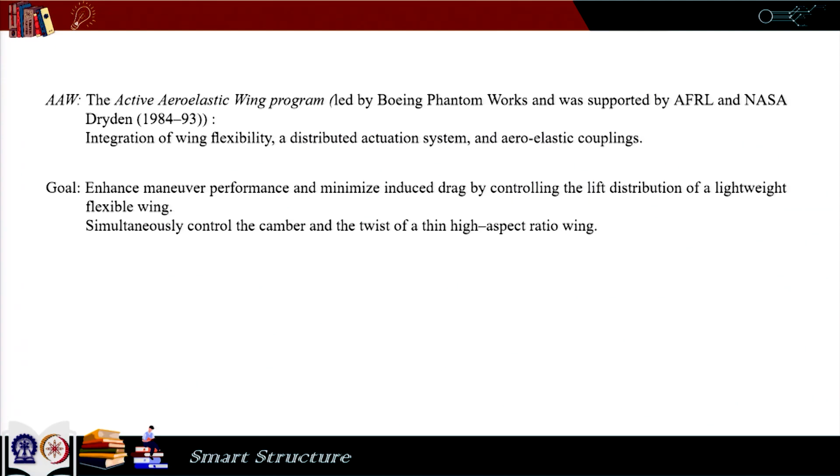Welcome to the third lecture. We will continue with the applications. AAW, the Active Aeroelastic Wing program, was led by Boeing Phantom Works and was supported by AFRL and NASA Dryden. It was about integration of wing flexibility, a distributed control actuation system and aeroelastic coupling. Here the goal was to enhance maneuver performance and minimize induced drag by controlling the lift distribution of a lightweight flexible wing.

Induced drag is also known as lift induced drag, and it can be controlled by controlling the lift distribution, and that is what they did. Simultaneously, control of camber and the twist of high aspect ratio wing was also the goal.

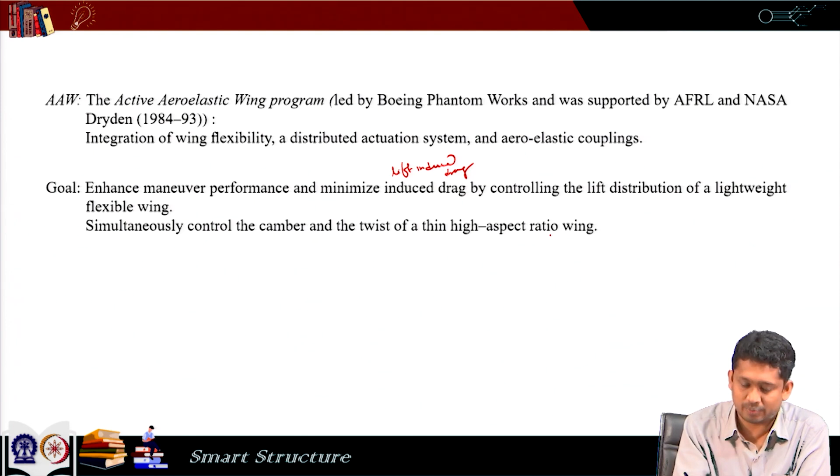Enable is evaluation of new actuators in buffet load environment. It was initiated by US Air Force and other participants were from Boeing, NASA, Australia and Canada. Its goal was to address a very practical problem encountered by high performance aircraft. When they are at high angle of attack, they often experience buffet loads. Those are unsteady differential pressure that happens due to edge vortices, and it leads to premature fatigue of the airframe.

And sometimes these vortices couple with other vortices that come from engine inlets and airframes, and that can be even more significant. Here the goal was to examine the performance of two sheet actuators, macro fiber composite actuator and active fiber composite actuator. These are composite actuators, so direction dependent actuation is possible. Macro fiber composite was invented by NASA. It is a piezoelectric composite, and it was then commercialized by Smart Materials in Germany.

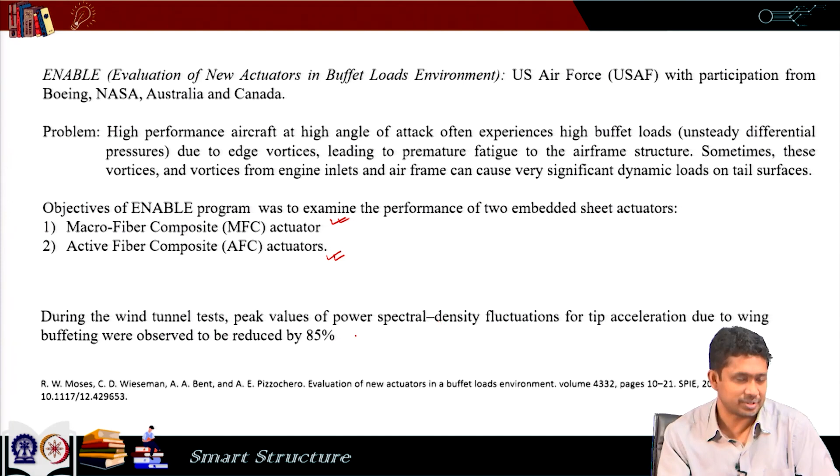ACROBAT stands for Actively Controlled Response of Buffet Affected Tail. It was a NASA sponsored program executed by Wright Laboratory and Daimler Chrysler. It used a 1/6 model of F/A-18 wing with piezoelectric sheet actuators placed at an angle at its root, to ensure both bending and torsional deflection.

A twin tail aircraft model was successfully tested in a low speed wind tunnel under the active vertical tail program led by McDonnell Douglas Aerospace to actively reduce buffet loads in a 5% scale model by controlling the first two bending and first torsion modes using piezoelectric actuators attached to a spar.

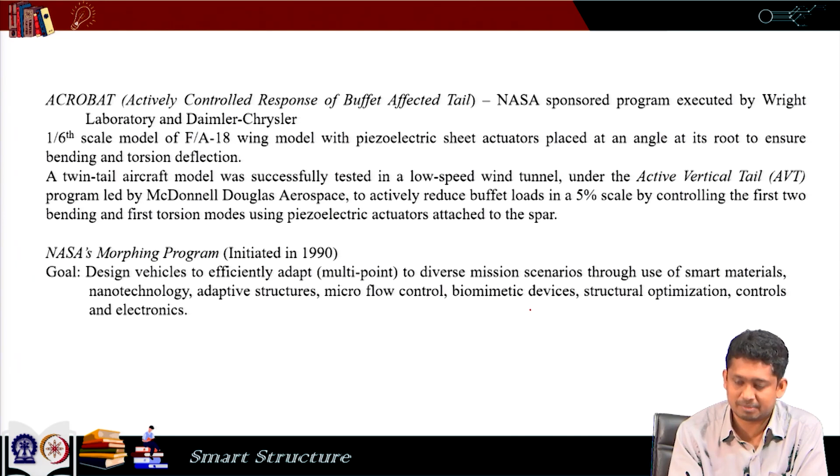Then NASA had a morphing wing program that was initiated in 1990. Here the goal was to design vehicles to efficiently adapt to diverse mission scenarios through the use of smart materials, nanotechnology, adaptive structures, microflow control, biomimetic devices, structural optimization, controls and electronics.

Now, we will talk about noise control in aircraft. Noise is something where a lot of research goes on, so noise control is an issue. Noise comes from engine, turbulent boundary layer, air conditioning and so on. Most of the noise control methods are passive, and those passive techniques have been quite successful. Noise has been reduced by a satisfactory amount, and there are two items where a lot of research is going on.

One is called acoustic metamaterials and sonic crystals. These are based on metamaterials concepts, where a lot of research has been done and found to be quite useful. But the idea is that if some kind of active component is added to the solutions, then the efficiency can be further improved, and that is what has been done in these two papers.

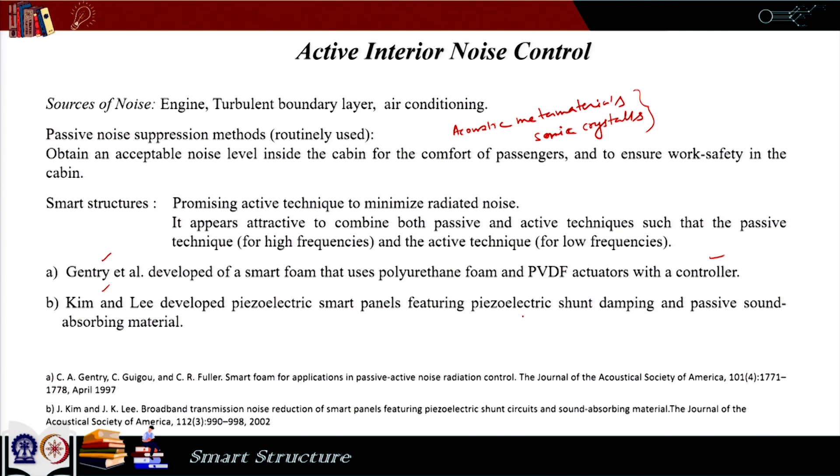Gentry and others developed smart foam that uses polyurethane foam and PVDF actuators with a controller. Kim and Lee developed piezoelectric smart panels featuring piezoelectric shunt damping and passive sound absorbing material.

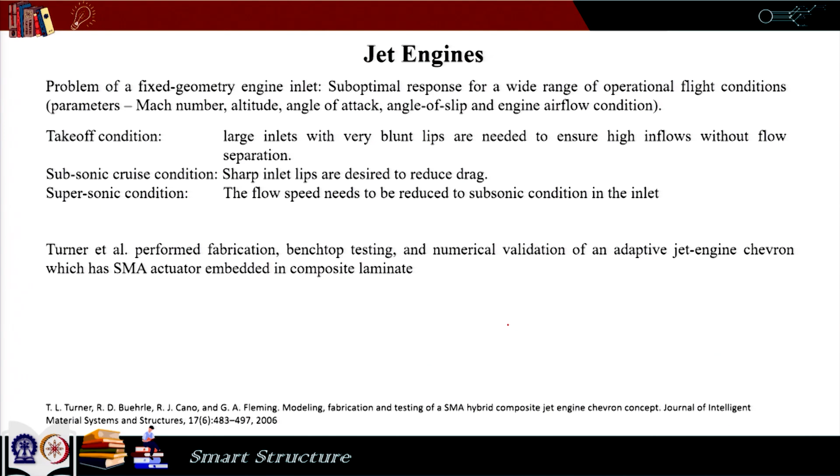Now, we will talk about jet engines. In jet engines, the problem is that if the jet engine has a fixed geometry inlet, then it does not work optimally in a wide range of wind speed, because at different wind speed the requirement is different. For example, in the takeoff condition, large inlets with very blunt lips are needed. This ensures high inflow without flow separation.

In the subsonic cruise condition, sharp inlet lips are desired to reduce the drag, whereas in supersonic condition the requirement changes. The flow speed needs to be reduced to subsonic condition in the inlet. So, the solution lies in some kind of adaptive inlet geometry, which can adapt to the changing wind speed.

Turner and others performed fabrication, benchtop testing and numerical validation of an adaptive jet engine chevron, which has shape memory alloy actuators embedded in a composite laminate. Composite laminates can be made shape adaptive just by sequencing the ply orientation in a proper way. We will talk about it when we discuss composite materials in more detail. Again, if some active component is added, here with shape memory alloy actuators, it can be even more shape adaptive.

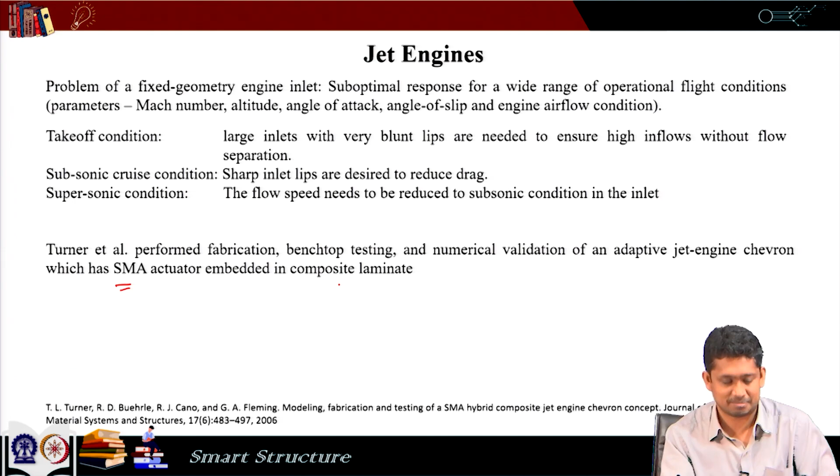Boeing 777-300ER with GE90-115B engine, which has a variable geometry chevron, which has 60 nitinol strip actuators. Now, Hartl and others carried out training and thermomechanical characterization of nitinol for application in the Boeing variable geometry chevron. So, after 50 thermomechanical cycles, the response was found to be quite stable with repeatable strain up to 1.6% over a wide range of applied stresses.

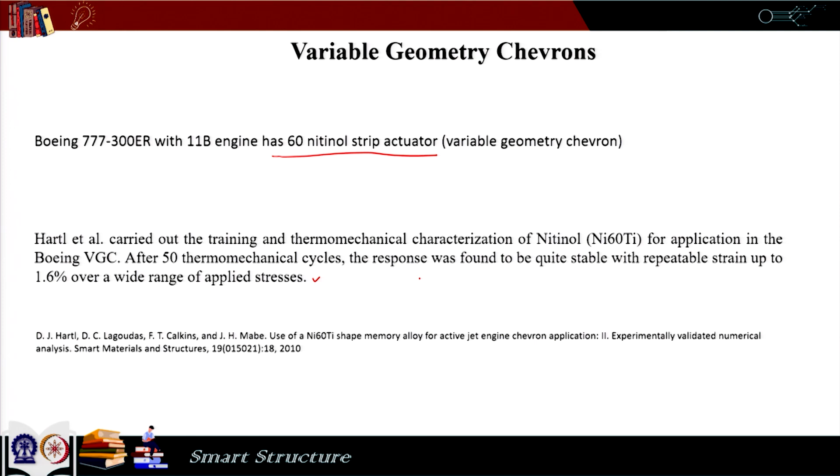So, shape memory alloys need something called training, where loading and unloading is done in a cyclic manner. We will talk about it again when we discuss shape memory alloys in more detail. So, that is what was done here, and the observations are mentioned. More details can be found here.

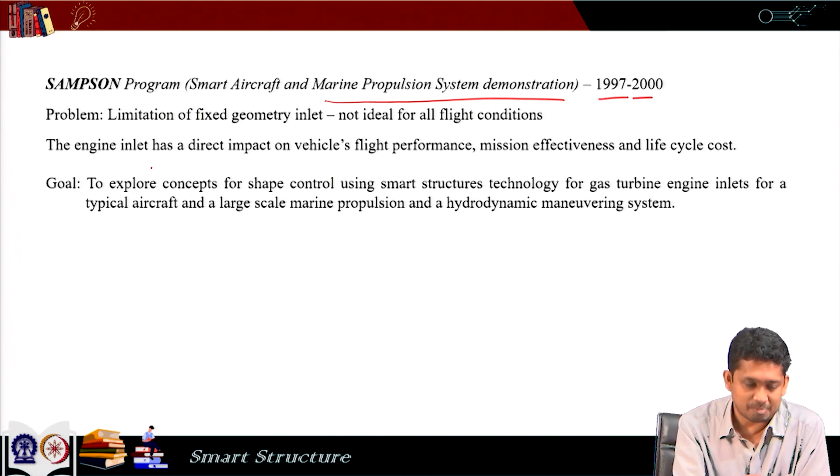The SAMPSON program has a similar goal. It is Smart Aircraft and Marine Propulsion System demonstration. It was between 1997 to 2000. The problem they addressed is similar, the limitation of fixed geometry inlet, which is not ideal for all flight conditions, and the engine's inlet has a direct impact on the vehicle's flight performance, mission effectiveness and life cycle cost.

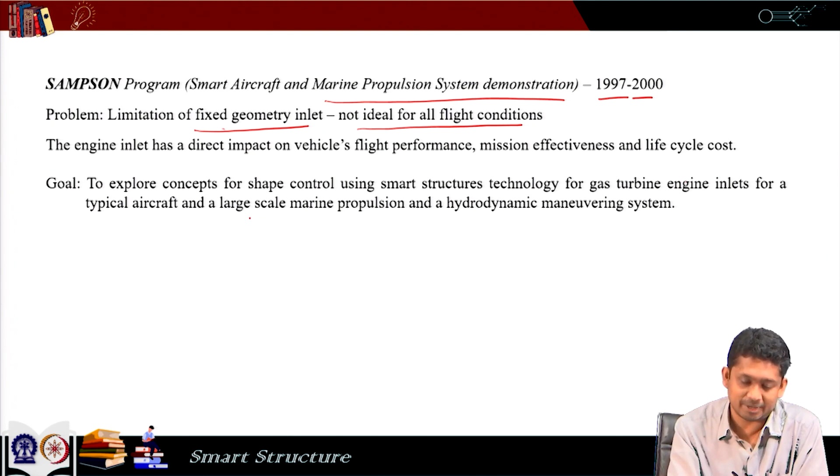So, the goal here was to explore concepts for shape control using smart structures technology for gas turbine engine inlets for a typical aircraft and a large marine propulsion and hydrodynamic maneuvering system as well.

In rotary wing aircraft, for example, a helicopter has a rotor. This rotor adds significant complexity. First of all, a rotor has complex motion. A rotor can have edgewise vibration, flapwise vibration, twist, and there are several modes where all these motions are coupled. It is connected to a hub. The hub itself has its own complicated kinematics. So, that makes the vibration of the rotors quite complicated,

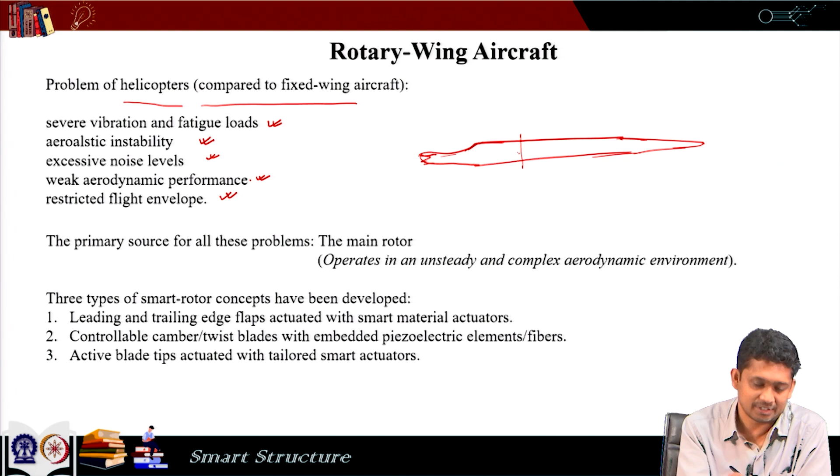and it is in a complex aerodynamic environment. So, there are significant complexities: severe vibration and fatigue loads, aeroelastic instability, excessive noise, weak aerodynamic performance, and restricted flight envelope. And as mentioned, the primary source for all these problems is the rotor.

So, three types of smart rotor concepts were developed: leading and trailing edge flaps actuated with smart material actuators, controllable camber twist blades with embedded piezoelectric element fibers, and active blade tips actuated with tailored smart actuators.

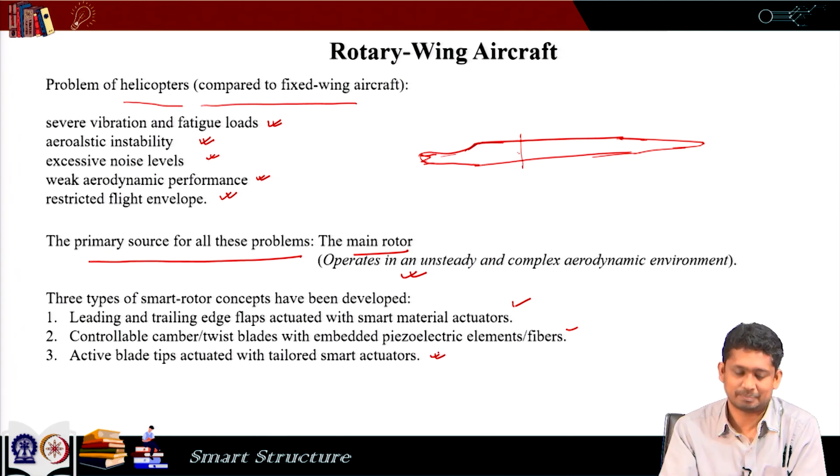Now, we will talk about civil structures. The applications are diverse in civil engineering structures as well: structural health monitoring, vibration monitoring and suppression, minimization of vibratory loads, earthquake mitigation. The objective here is to maximize civil structure performance, to control structural motion, monitor health, minimize life cycle cost, and most importantly increase the overall safety.

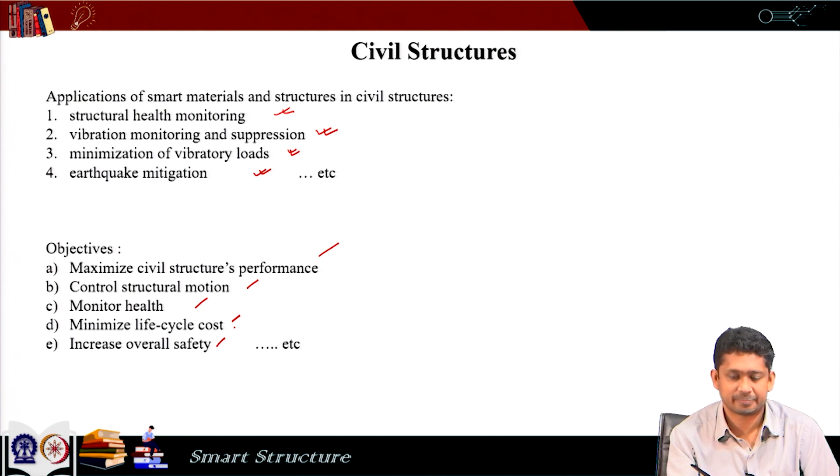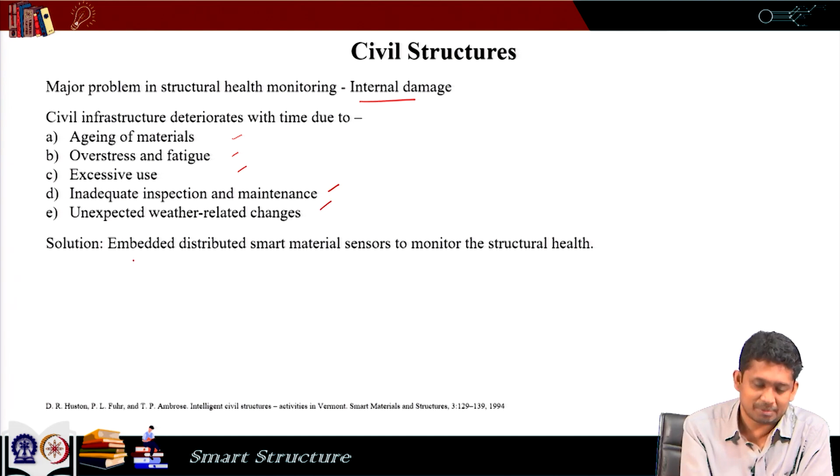Now, a major problem in structural health monitoring is internal damage. Civil structures deteriorate with time due to several factors: aging, overstress, fatigue, excessive use, inadequate inspection and maintenance, unexpected weather related problems. So, embedded distributed smart material sensors to monitor the structural health is a solution.

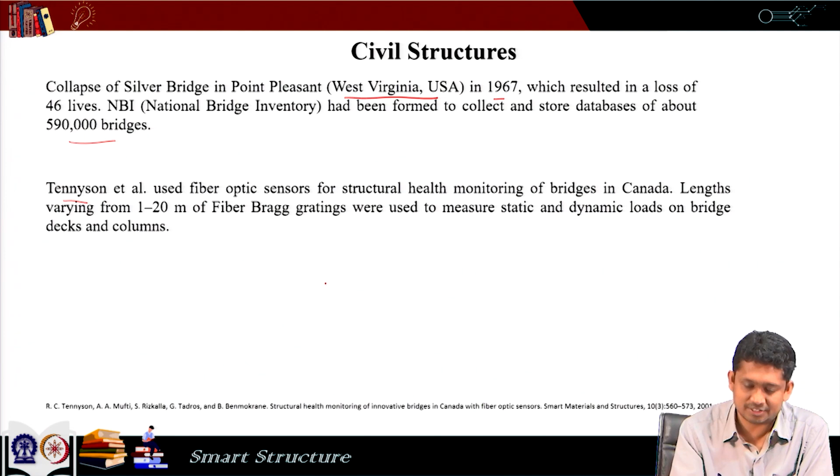There is a study by Tennyson and others. They used fiber optic sensors for structural health monitoring. With the fiber optic sensors, they monitored the strain at various parts of the bridge as the vehicles passed by, and strain variation like this was found.

Now, if this kind of strain variation is monitored on a regular basis, then any anomaly can be detected. That was the goal of this kind of work, and strain monitoring is used a lot with the help of fiber optic sensors for civil engineering structures.

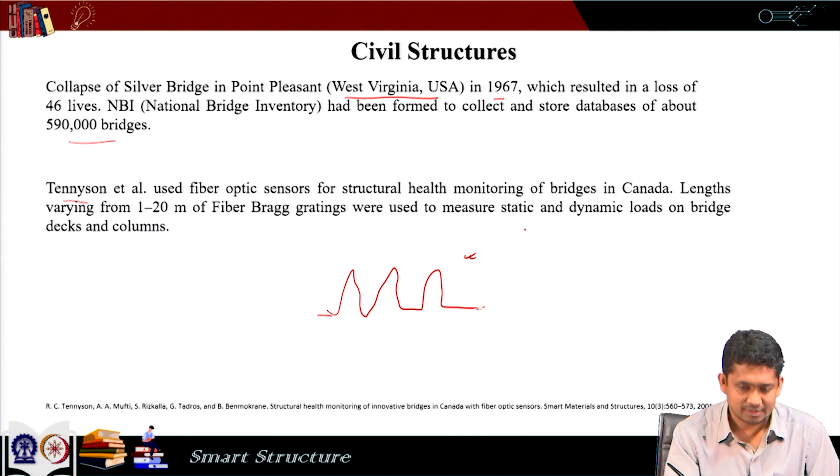Suspension bridges and cable stayed bridges all have these cables as a major component of the structure. Now, apart from the loads due to traffic or earthquakes, wind load also causes a lot of severity in these structures. Because of complicated interaction between the wind and the structure, phenomena like vortex induced vibration and flutter happen. An example is the failure of the Tacoma Narrows Bridge in USA.

Now, it was observed that if the tension in the cable can be monitored, that can help a lot for monitoring these bridges. So, that was the goal of this study carried out by Wang and others. They measured the tension in the cable using PVDF piezoelectric film sensors.

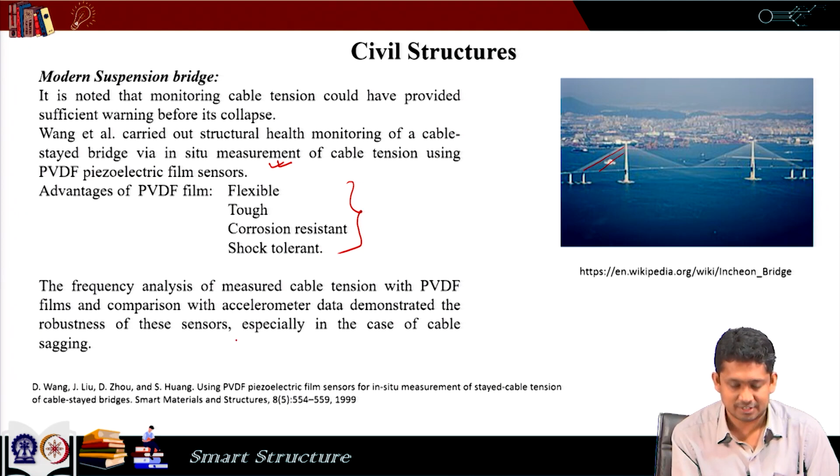As was mentioned while comparing different smart materials, PVDF has a much lower elastic modulus compared to PZT. Because these cables are somewhat flexible, PVDF was found to be a better solution here. And it was observed that frequency analysis of measured cable tension with PVDF films and comparison with accelerometer data demonstrated the robustness of these sensors, especially in the case of cable sagging.

Now, vibration control is another aspect. Magnetorheological fluid is used a lot for this kind of application. A semi-active MR damper is used to stabilize large amplitude motions due to high gusty winds and traffic vehicles. It helps reduce fatigue and corrosion of the strands and increases the safety and durability of the bridges.

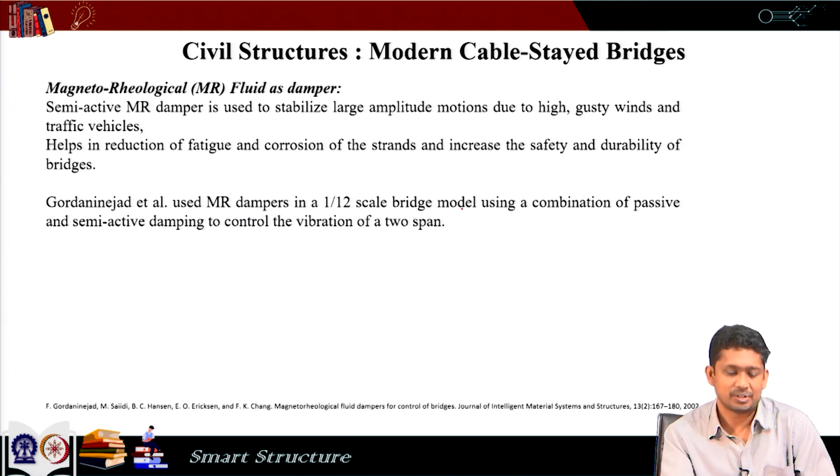So, Gordaninejad and others used MR dampers in a 1/12 scale bridge model, using a combination of passive and semi-active damping to control the vibration of two spans.

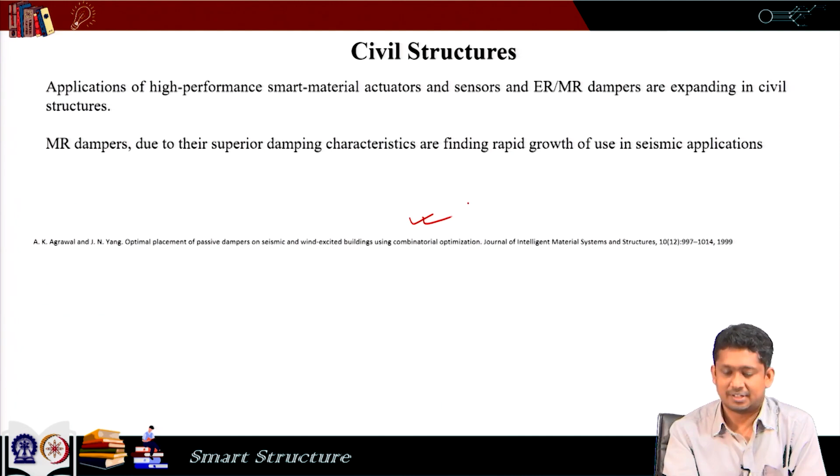So, MR dampers are finding growing applications in civil engineering structures. An extensive study on MR dampers for seismic and wind excited buildings can be found here, and here we can find some optimization also for proper usage of these dampers.

Now, we will spend some time on structural health monitoring, because it is a very cross disciplinary problem. Aerospace structures, civil structures, mechanical structures, marine structures, everywhere the monitoring of the health is needed to enhance safety and efficient use of these structures. Structural health monitoring is basically based on the principle of looking at the structural response to some known or unknown excitation, and from the response data is analyzed and some information about the structural health is assessed.

So, structural health monitoring can be passive. In a passive, generally no actuator is needed. Whatever the structural data is obtained because of the ambient condition, that is used to find out the structural damage status. So, passive examples can be vibration based monitoring.

Now, vibration based monitoring can be done with known vibration also by hitting it with an impact hammer or shaker, but when the vibration based monitoring is done just by looking at the ambient vibration due to the ambient load condition, that is a passive monitoring. Acoustic emission, these are all passive techniques.

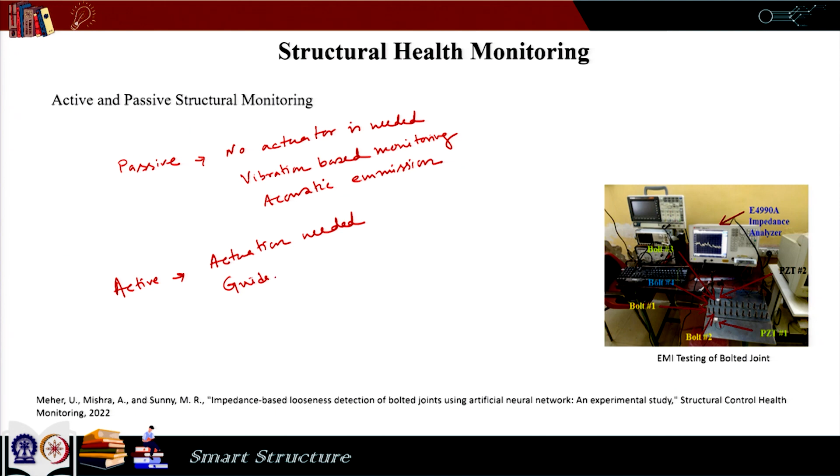Active techniques involve actuation. So, some known signal is given to the structure and the structural response is looked into. So, it can be a guided wave based technique, electromechanical impedance technique. These are all active health monitoring techniques.

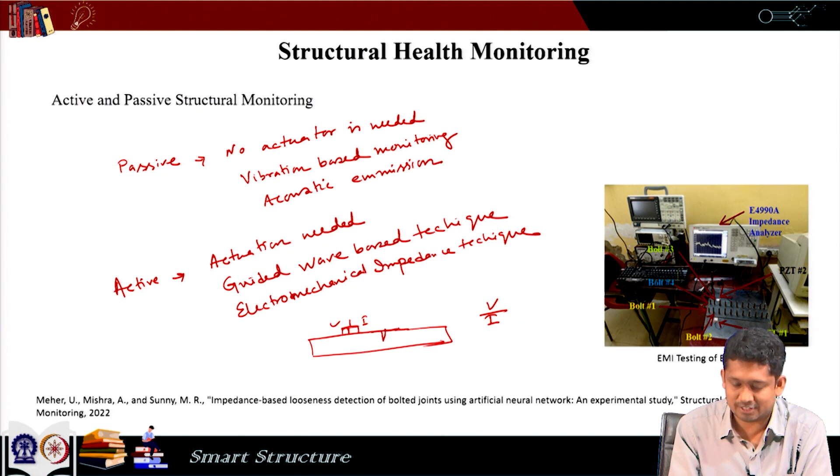So, in an electromechanical impedance based technique, if I have a structure with some piezoelectric patch fitted to it, if I apply some voltage to it, I can measure the current also across this patch. So, the V by I, this ratio is the electromechanical impedance obtained here. It is electromechanical because this impedance depends on the structural property also. If there is some flaw in the structure, this impedance changes, and from this change structural health can be assessed.

Now, here is one example. Here an experiment is being done in our lab to find out any looseness in bolts. So, it needs an impedance analyzer and it has bolts, the looseness of which is being monitored, and it has piezoelectric patches.

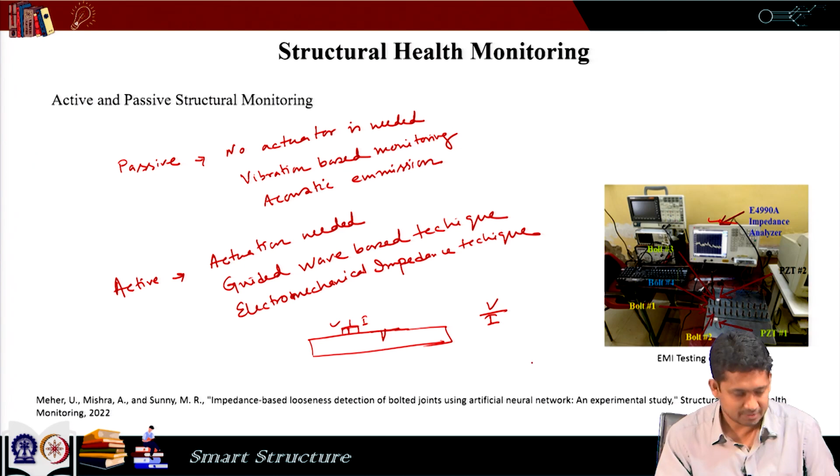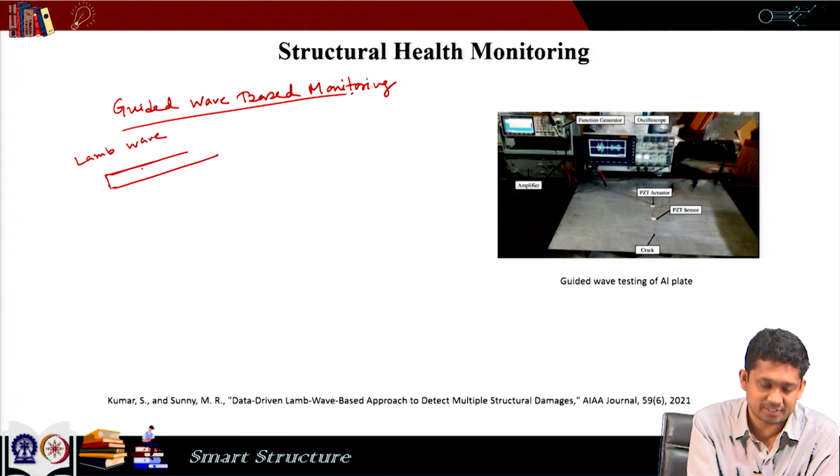Guided wave based monitoring. So, in guided wave based monitoring, guided waves are waves whose traveling is guided by some wave guides. One example is Lamb wave, where the wave guide is the two opposite surfaces of a thin structure like a thin plate, as can be seen here. So, the wave remains confined within this thin boundary and travels. These waves can travel a long distance. That is why they are quite useful, because with a small number of actuators a larger area can be scanned.

Now, a very simple schematic view of a guided wave based system can be like this. If I have a piezoelectric patch here, if I excite it here, the wave propagates and the wave is sensed here. Now, during propagation, if it encounters any damage, the sensing response that we get here changes, and from that change again we can find out if there is any problem in the structure or not.

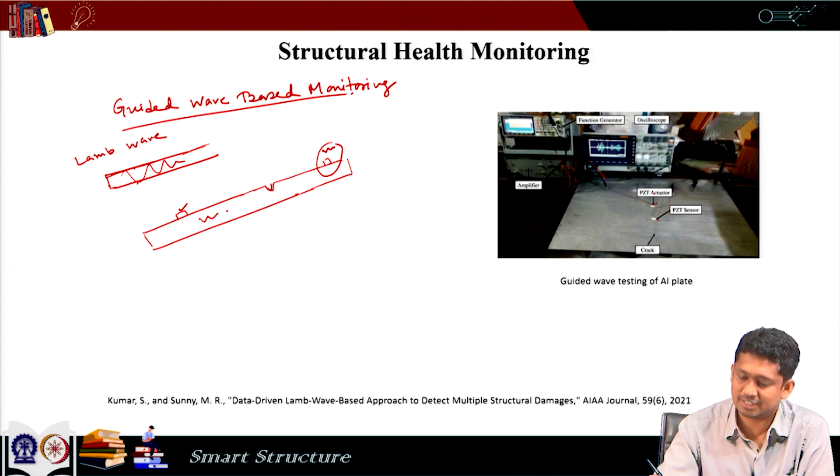So, here is one guided wave based experiment shown here. We can see a plate, here is a piezoelectric actuator which is excited by a function generator, and there is a sensor, the data is collected through an oscilloscope, and it tries to find out any problem in the structure along this dimension.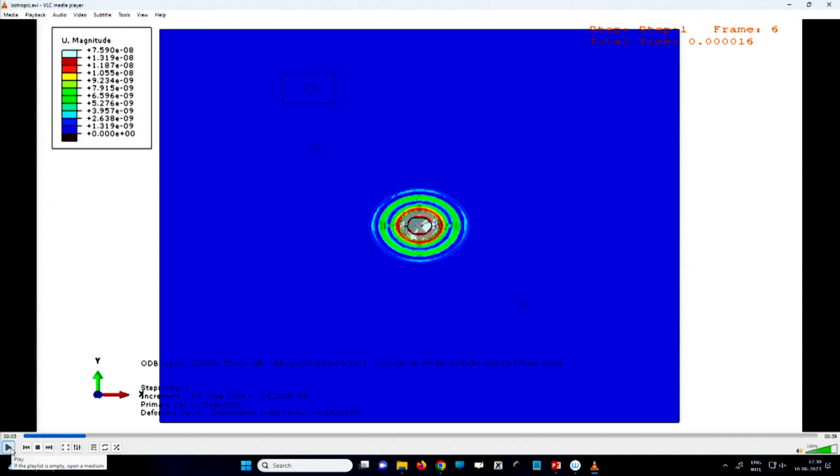So, this video shows the propagation of guided wave. The guided wave is generated by a piezoelectric patch which is placed at the center. Now, because this structure is isotropic and the piezoelectric patch that we used was circular, the wave is propagating uniformly across all the directions, and we will see how damage is changing the propagation pattern.

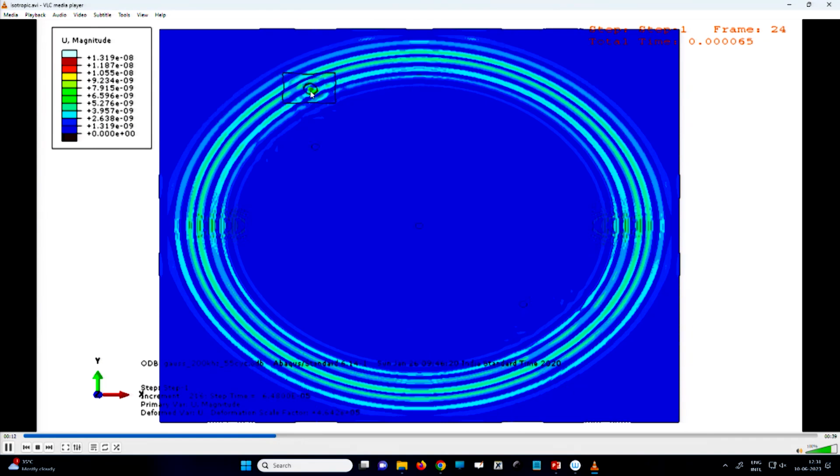So, once the wave is reaching here, we have put some damage here. We can see that because of this damage the wave is getting scattered. So, the wave propagation pattern here is somewhat different from the wave propagation pattern here. So, any sensor that is placed here, the reading that it gets will be different from any sensor placed here where there is no damage. So, the wave propagation pattern also incorporates information about damage, and the goal is to extract the damage information from the wave propagation pattern.

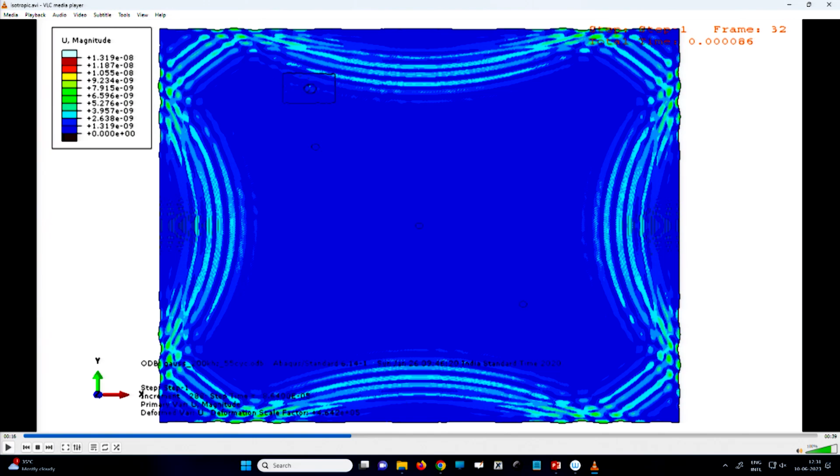Now, it has several complexities. For example, when the wave hits the edges, again it comes back. So, there are lots of reflections. So, it needs lots of advanced processing to find out the damage from this wave propagation. So, that was just to give an idea about the application of these piezoelectric materials for damage detection using guided waves.

In automotive systems also, smart materials find a lot of use. It is generally in active control of vibration, active suspension and engine mount, fuel injectors for diesel and gasoline engines. Suspension can be passive, active or semi-active.

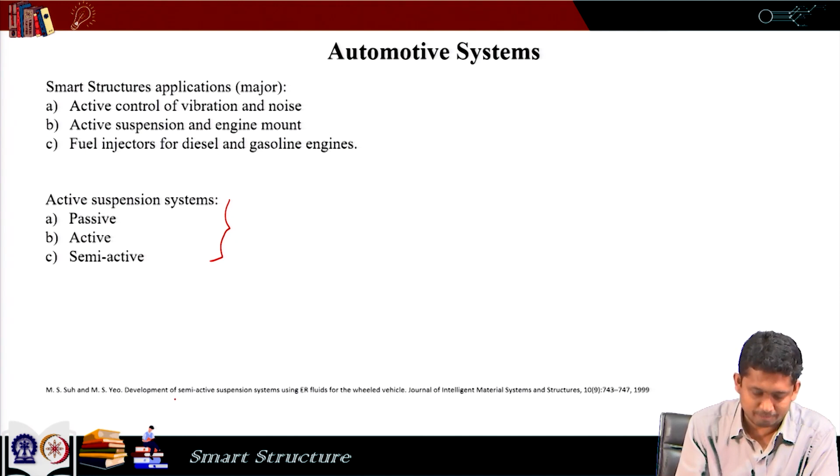In this paper, a development of semi-active suspension system using ER fluid can be found. Here one marine system application is shown, that is S2DS, Smart Sleeve Demonstration System. The objective was to develop a significant quieting improvement of about 10 decibel reduction in self-generated underwater torpedo noise, using a compact and less expensive system. So the solution came in the form of development of a highly maneuverable underwater vehicle based on swimming techniques and anatomic structure of fish.

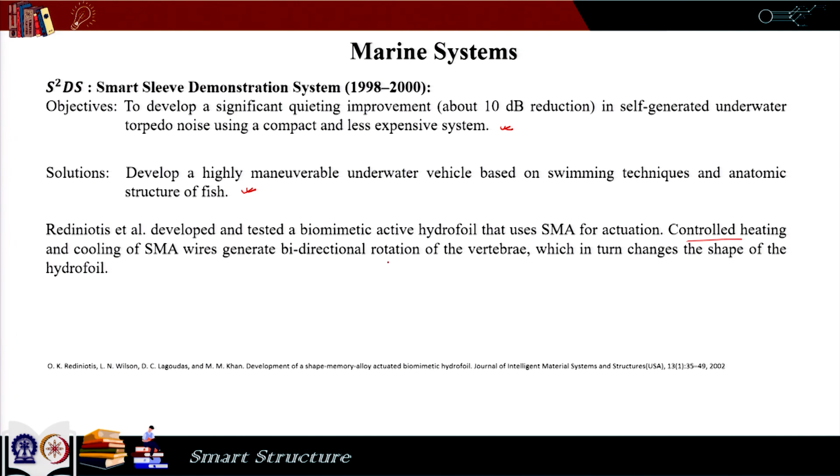Rediniotis and others developed and tested a biomimetic active hydrofoil that uses shape memory alloy for actuation. Controlled heating and cooling of shape memory alloy wires generate bidirectional rotation of the vertebrae, and this in turn changes the shape of the hydrofoil.

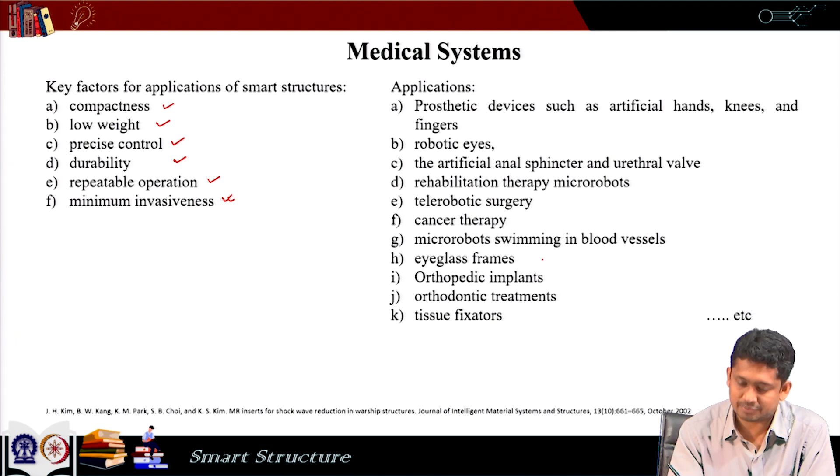There is growing use of smart materials for medical systems also. In medical systems, the requirements are compactness, low weight, precise control, durability, repeatable operation, and minimum invasiveness, which is required for surgeries. Applications involve prosthetic devices such as artificial hands, knees and fingers, robotic eyes, artificial sphincter and urethral valve, rehabilitation therapy, microrobots, telerobotic surgery, cancer therapy, microrobots swimming in blood vessels, eyeglass frames, orthopedic implants, orthodontic treatments, and tissue fixators.

There is a study by Dong and others. They developed a smart variable resistance exercise machine using MR fluid dampers for rehabilitation of patients suffering from neuromuscular and orthopedic conditions. So in an exercise equipment, generally the resistance offered is not so properly tuned.

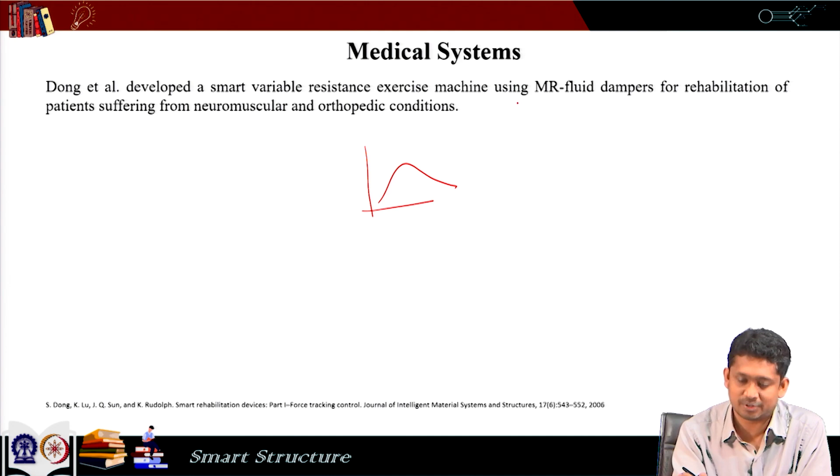So that is what they wanted to address here. During the stretching, the maximum force is not achieved at the beginning and at the end; generally the force is somewhat low there, and the maximum force is achieved somewhere in between. So that is what they wanted to do through this work. The resistance offered by this exercise equipment was tailored in such a way that when required, it offers the maximum resistance.

Minimally invasive surgery is quite popular now because of its several benefits, causing less difficulty to patients. Small and compact surgical tools with viewing equipment attached to a long slender tube are inserted into the body through a few small incisions about 5 to 10 millimeters, and are generally used for this. Now the limitations of these tools are lack of dexterity and localized actuation of the surgical end effector, and lack of haptic feedback to the surgeon.

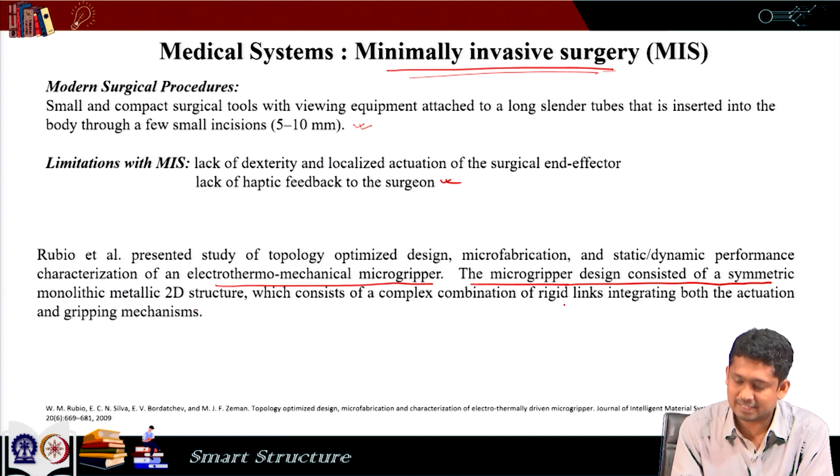Because of that, Rubio and others presented a study of topology optimized design, microfabrication, and static dynamic performance characterization of an electrothermomechanical micro gripper. The micro gripper design consisted of a symmetric monolithic metallic 2D structure. This consists of a complex combination of rigid links integrating both the actuation and gripping mechanisms.

Now finally we will talk about energy harvesting applications. As was mentioned earlier, energy harvesting wants to offer some smart solution to power requirement sensors and the electronic equipment associated. The motivation here is that recent developments in low power and efficient microelectronics lead to interest in energy harvesting using smart materials. So piezoelectric materials, using the direct effect, can harvest part of the energy associated with mechanical vibration.

There are several works in this area. For example, Sodano and others showed an aluminum plate attached to a piezoceramic plate could charge a 40 milliampere hour battery within a couple of hours.

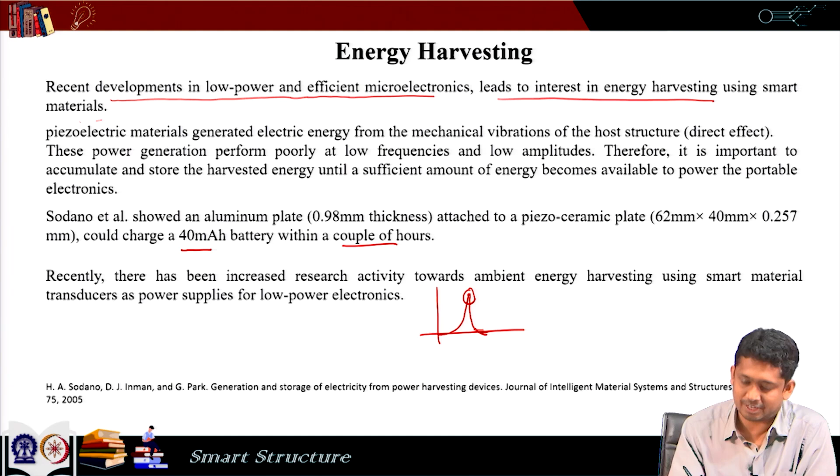When it comes to energy harvesting, there are a lot of observations. For example, in linear systems, the energy harvested is maximum when the frequency of oscillation is very close to the resonance frequency. So the moment we are away from the resonance frequency, the harvesting efficiency is quite low. That is why in a nonlinear system we can do more broadband energy harvesting.

So there is a good amount of work in this area, and there has also been observation that in bistable systems the energy harvesting is even better. Bistable systems can have small vibration within one potential well, with respect to one stable configuration. There can be large amplitude vibration with respect to one stable configuration, and there can be large vibration where it shifts from one configuration to another. When it does that, even more energy can be harvested.

Also, especially in aeroelastic systems, if the system is prone to flutter, then instead of dissipating the extra energy, it can be meaningfully harvested for some special purpose. As said, flutter is a growing oscillation, so the structural system starts taking energy from the aerodynamic system. Instead of dissipating the energy, by using a properly designed energy harvester the extra energy can be absorbed, which stabilizes the structure, and the absorbed energy can be useful for some meaningful purpose.

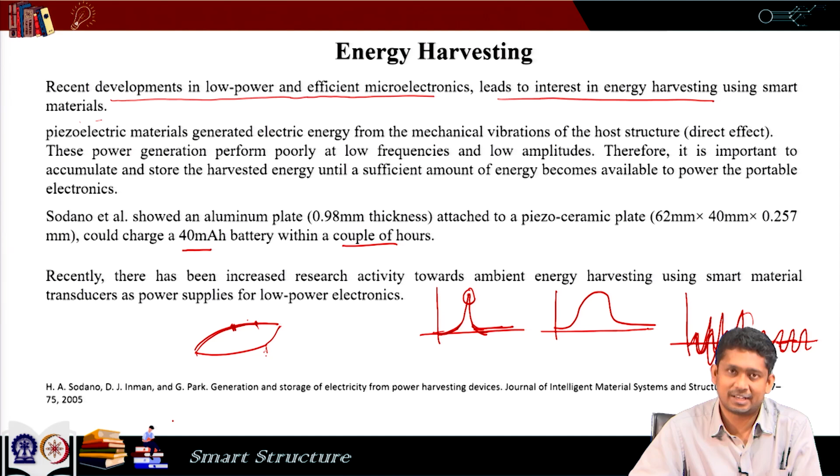So there are endless possibilities. With this discussion on these diverse applications, we can see that there is endless possibility with smart materials and smart structures, but at the core of it lies proper material modeling and proper analysis. That is what this course is about. Now we will gradually move into various smart materials and smart structures. From the next class, we will start discussing piezoelectric materials. So with this, we finish this introduction. Thank you.